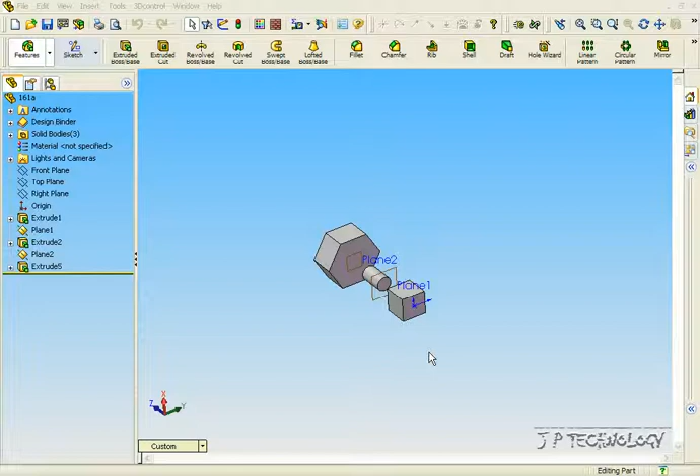Now if you look at the two, they are identical, and what I'm going to show you is that we're able to create a different object by blending three different objects together using the deform curve-to-curve. But the sequence in which you put these together will result in a different final product.

So I'm going to show you how to mesh three of these together, and then show the difference between doing one style. On 161A, we're going to do one style, and on 161B we're going to do another. It's just a different order of how we go through it, and we're going to get a different result.

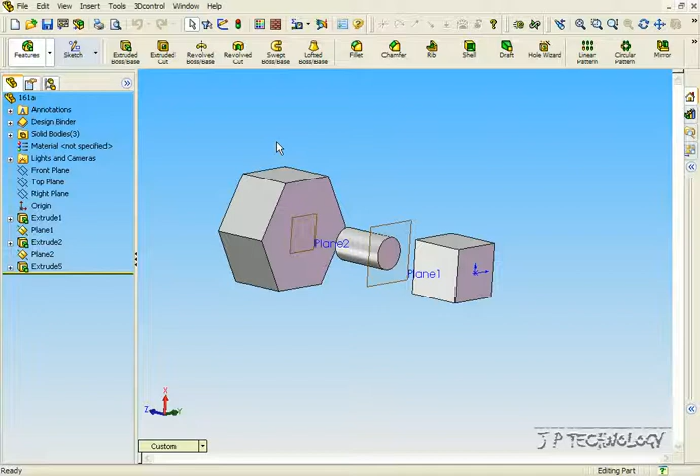So to start off, let's go to 161A, and let's open up the Deform feature. Click Insert, Features, click Deform.

Let's click Curve to Curve, and we'll start off by clicking the circle and then click the target curves, and we'll do the hexagon here. So let's start clicking all the edges all the way around.

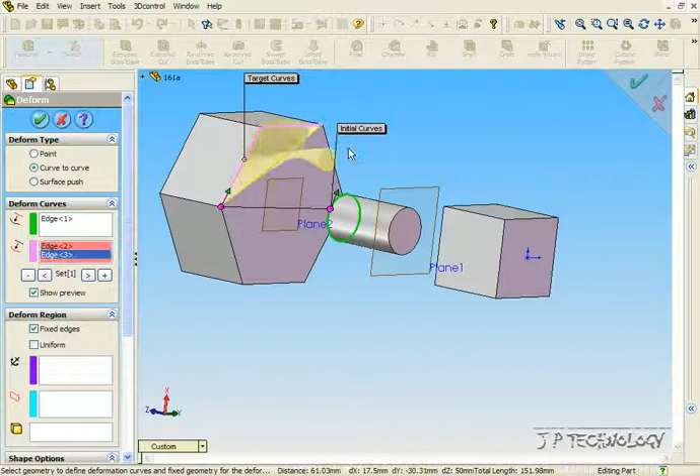Looks good, we like it. Click OK. And now we have our first deform.

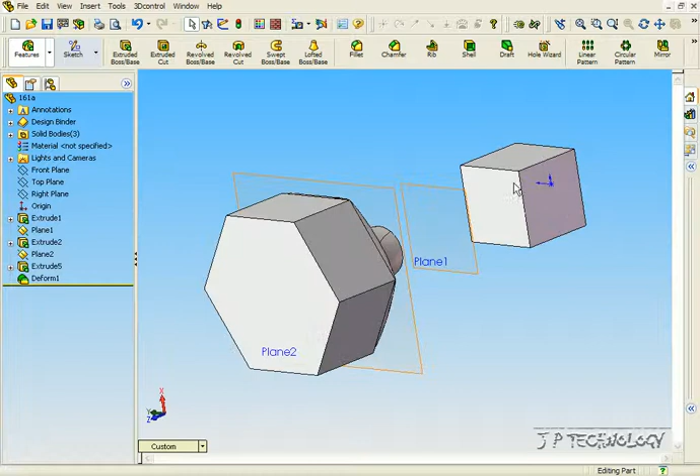Now let's do one more, and let's bring this square into this deform that we just made. So let's click Insert, click Features, click Deform, and let's click the four sides on the square.

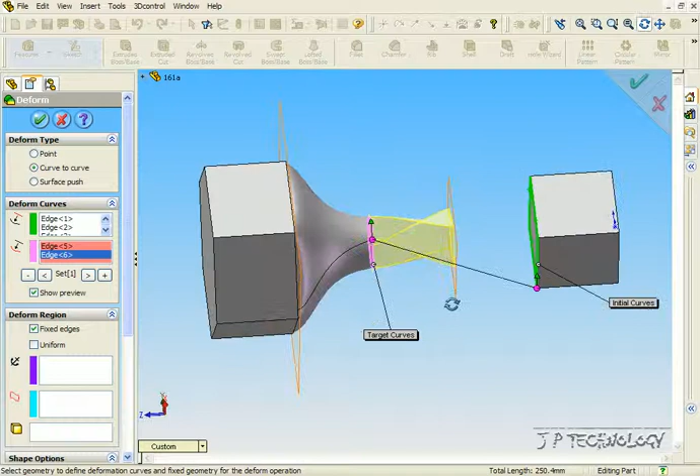Now let's click these edges here, and it looks like what we want.

Click OK. And if we click on Extrude 5 and hide it...

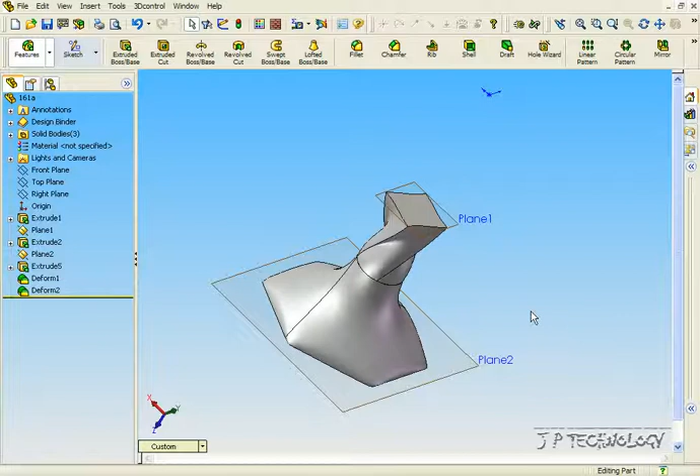Now we've got a deform using three shapes, kind of bringing them together. This certain shape that we've ended up with, we wouldn't be able to do it just with one deform. So we've brought three different objects together and kind of molded them together.

And this is a really good tool if you have multiple bodies that you want to bring together. You're able to do this, so you're not just relying on two bodies to make one certain object at the end.

You can bring as many as you want in and slowly build them up and deform them all together into one. Now let's go to 161B, and we'll do it in a different sequence and get a different result.

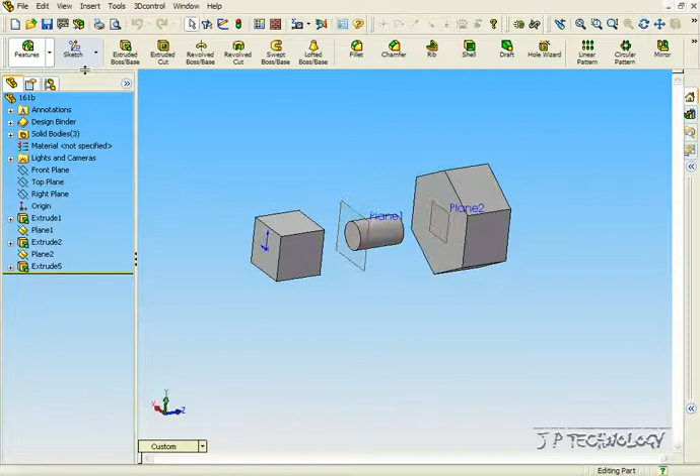Click Window and flip over to 161B. So let's start, and let's click Insert, click Feature, click Deform.

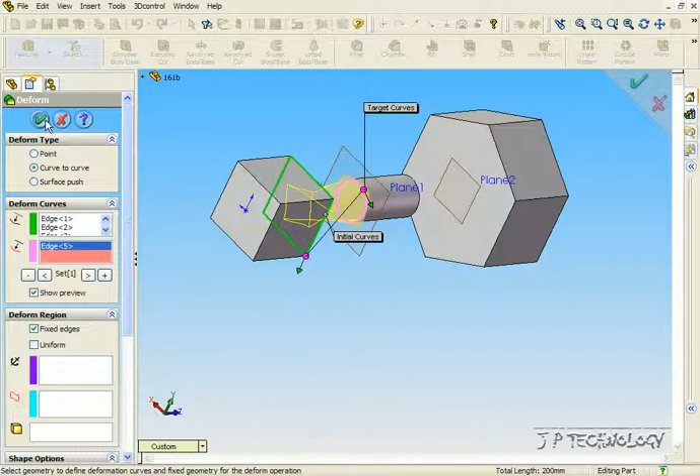Now let's start off by clicking these four sides on the square, and then we'll click the circle, click OK. And we might just have to flip this around.

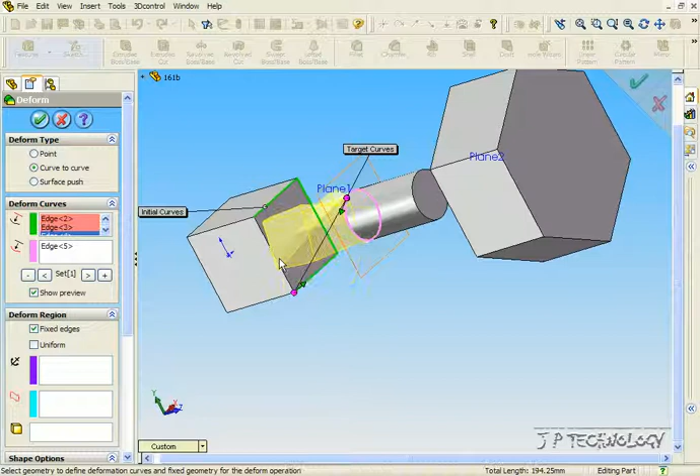Let's get rid of the lines and try it again. Sometimes it's just the order that you pick that it doesn't like, so you just have to keep trying until everything looks good. And this one looks good, so let's click OK.

And now we're going to do the same with the hexagon going to the circle.

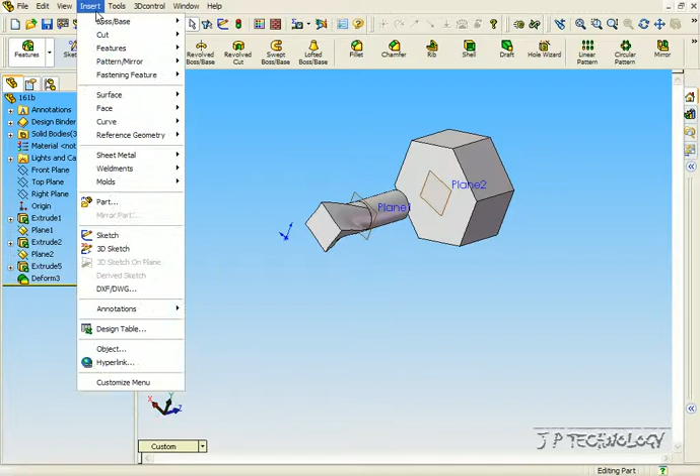So click Insert, click Features, click Deform, and we'll click all the sides of the hexagon.

And then we'll click the circle, and it looks like this one's good too, so let's click OK.

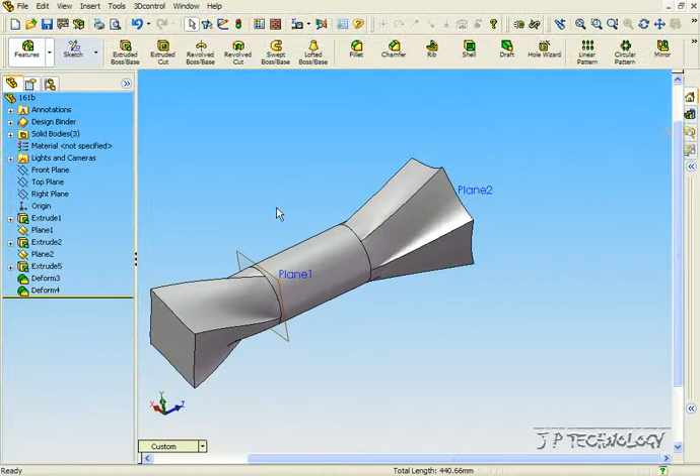And now we've got two deforms on each side. Now let's click Extrude 5, and let's hide the cylinder in the middle.

And now let's bring these two deforms together. So let's click Insert, click Feature, click Deform.

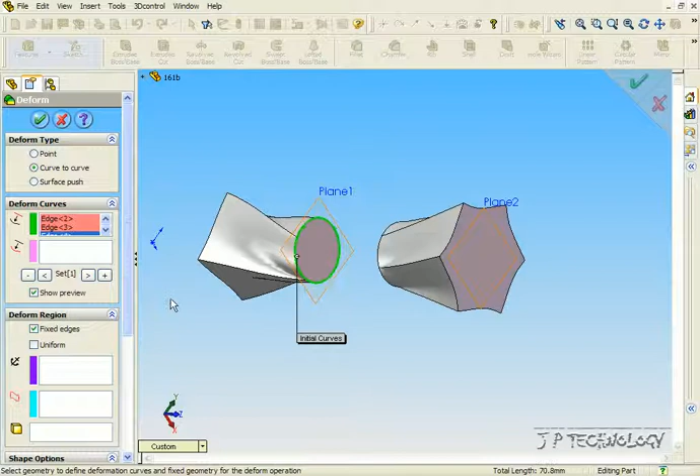And let's click the deform from the square first. And now we'll click the deform from the hexagon.

And it looks like it's going to go through, so let's click OK. No, so let's try flipping it.

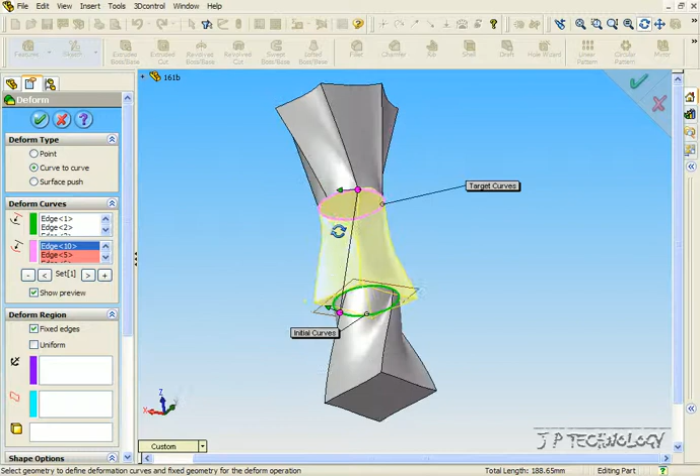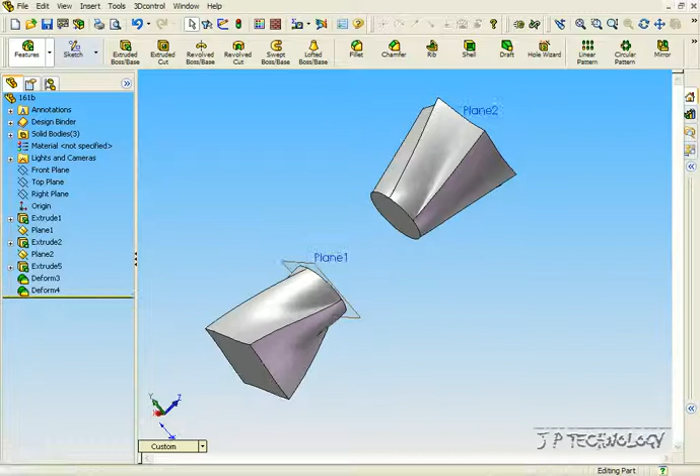And that's not right, so let's click Control Z and back it up. Now let's try this again. Like I showed before, sometimes it's just the order that you do it in, and you just might have to go back and try it all over again.

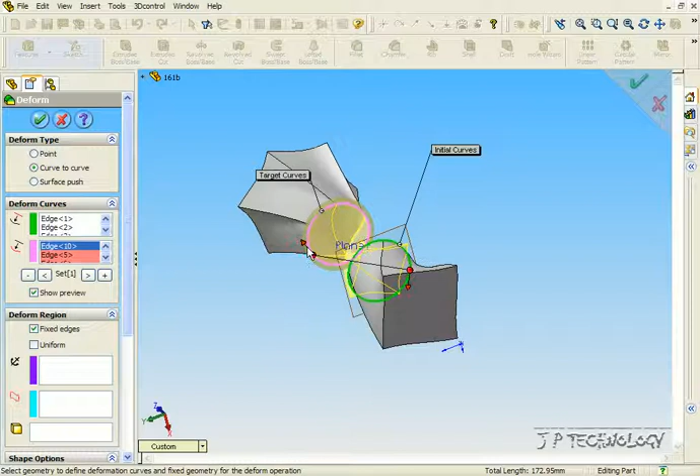And let's see if it'll take it this time. Okay, let's delete all these edges here in this box from the hexagon, and let's try them again one more time.

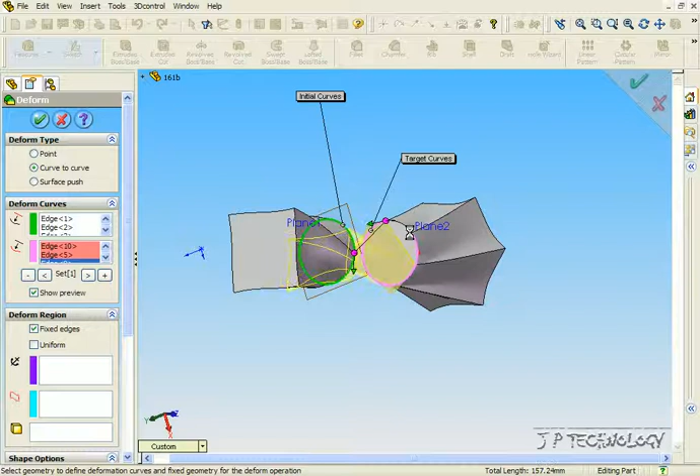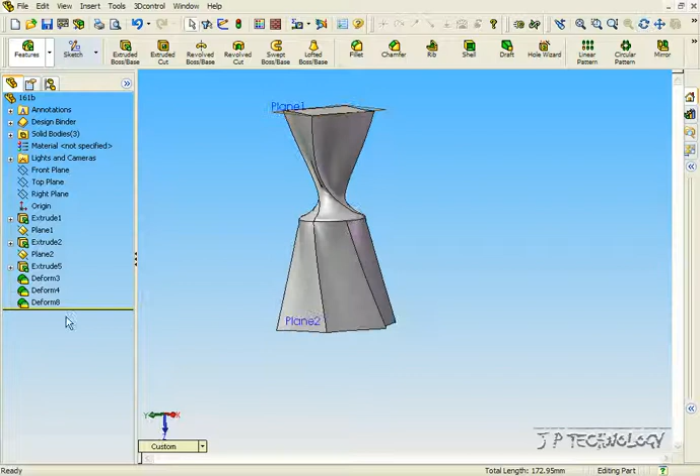And there we go. So sometimes you just have to change the order, and you also have to change, if we go into the feature, the shape options. So just by playing around with those, then you might get it to work.

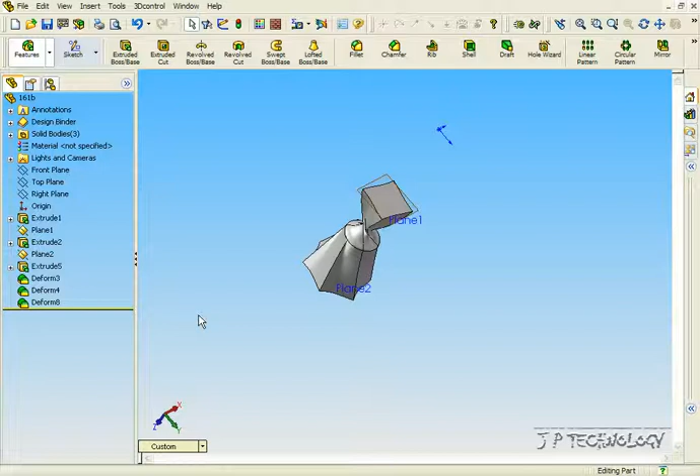So now we're left with this as our deform. We've deformed off of the square and the hexagon into the cylinder, and from those two deforms we brought them together. So now we've got a different shape than what we got in 161A.

So if we flip between the two by pressing Control Tab, you can see the two different results that we got from the exact same set of objects. So depending on the sequence and the order that you're doing your deforms, and which edges and what variables we put into it, we're going to get different results all the time.

So in this tutorial, what I'm trying to show you is that if you have multiple bodies, you're able to slowly bring them together to make a deform that you want. And depending on which order that you're deforming in, you're going to get a different result every time. So this tool, again, it's very nice.

You're able to really play around with it, and you're able to manipulate it, and slowly you're able to get it to do what you want it to do.

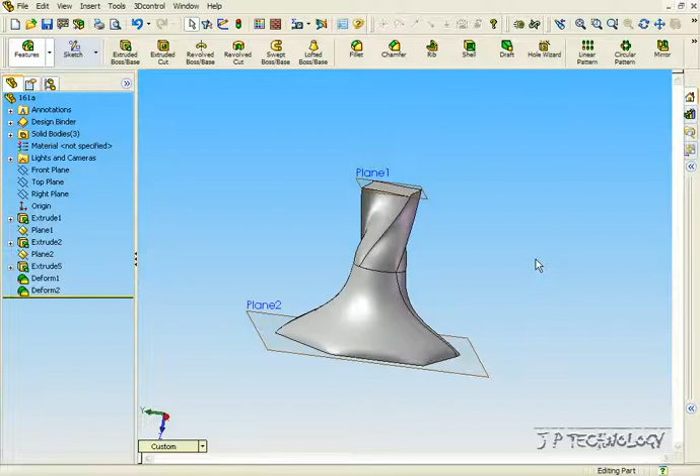So it's a very creative tool. It's not very math, and not too much engineering behind it. It's more of an artsy feel to get the look and style you're looking for. So that concludes our tutorial on the multiple deform curve to curve feature within SolidWorks.